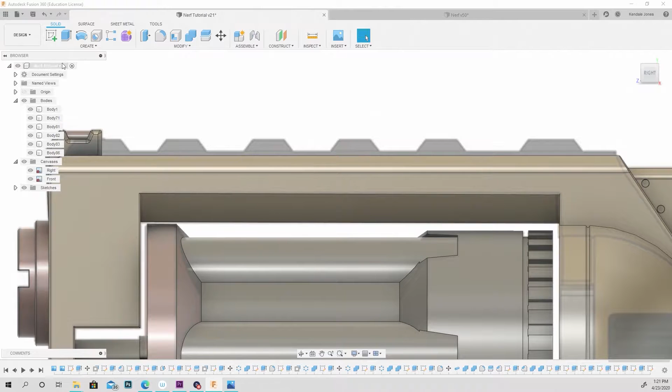Now from the right view, let's just create a sketch on the 2D background. Let's use the 2-point rectangle, and we're going to start with the base. So from the top left corner, about here, and we're going to end around in the back at the bottom right to get that rectangular shape.

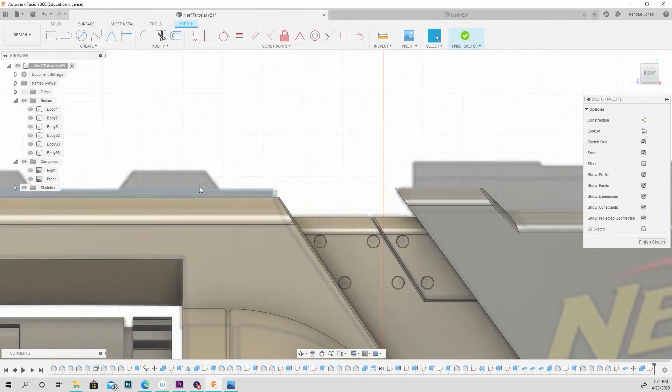Now let's press pull this profile, and let's go to the front view so we can better reference it. I'm going to press pull this to about somewhere around here, and let's set the operation to new body, and change the direction from one side to symmetric, and hit OK.

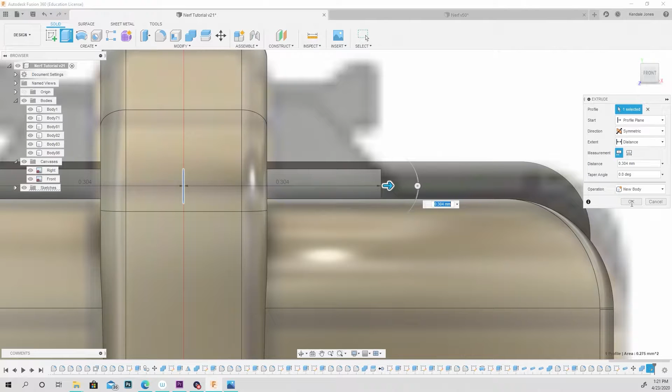Now back in the right view, let's just click the side of the rectangle and create a sketch. Now let's use the line tool to mimic this reference here.

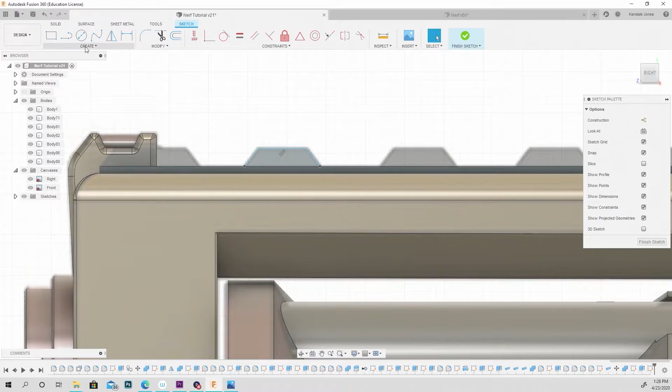Now what we can do is go to the create dropdown and select rectangular pattern, and we're going to pattern this along this surface. So double click to select the entire sketch. Now set the quantity to 4, and we're just going to drag this to about here.

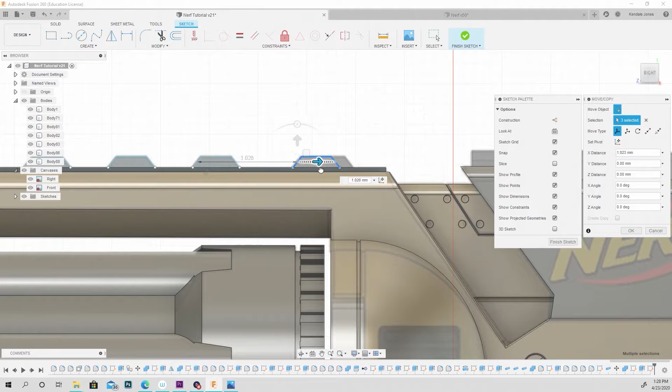Let's hit OK, and let's double click this so we can copy paste, and we're going to drag this along somewhere around here. Hit OK, and let's drag this back end to about here.

And we're going to double click this to select it. Now we're going to copy paste and slide this one to match the reference. And also I want to adjust some of these lines.

So let's just drag this back end line, and we're going to select the top line as well. And we're just going to slide it down so it doesn't intersect with that front side post.

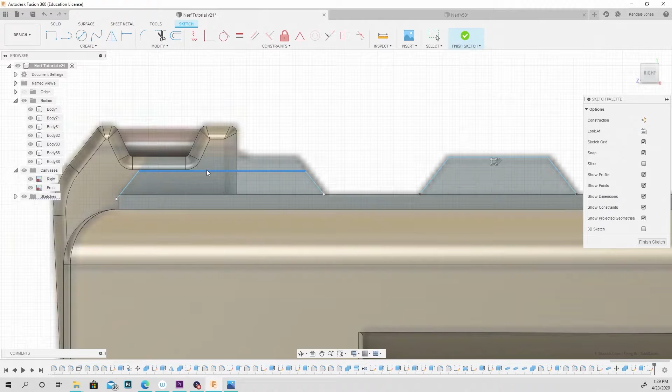Now we can press pull these profiles at the same time by shift selecting them. Let's go back to the front view, and let's just drag these to about the center line. And let's extend past the center line actually, and let's set this to new body.

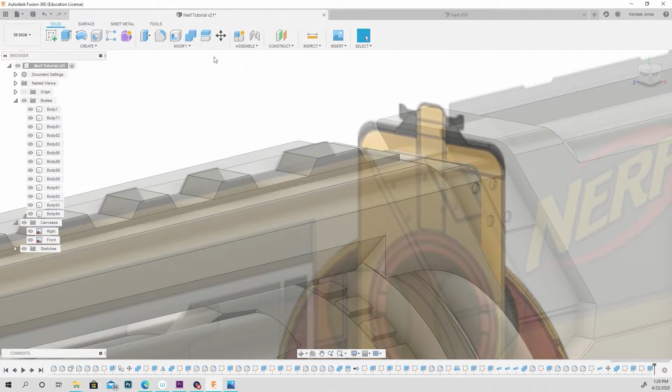Now what I want to do is go to modify, chamfer. I'm going to chamfer these right edges, using the front view to reference. Once satisfied, I'm going to hit OK. I'm going to do the same for this front rectangle as well.

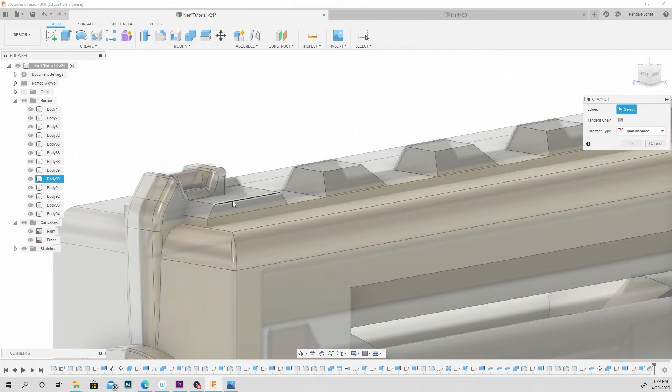Let's just drag this inwards a bit. Let's hit OK.

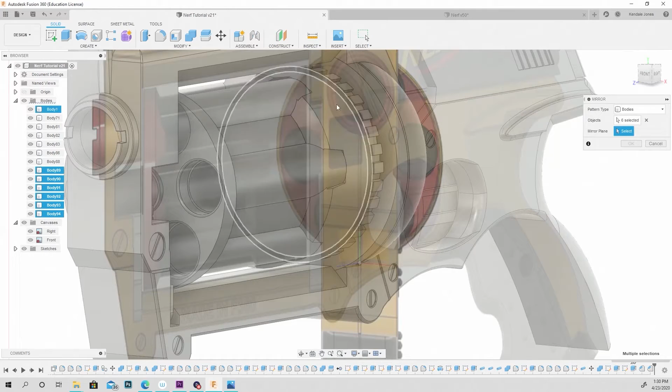Now what I'm going to do is go to create, mirror, and I'm going to mirror all of these rectangular pieces. Then I'm going to select the mirror plane, hold the left mouse button and select YZ, which is that plane, and hit OK.

Now let's combine all of these pieces together. So the bottom base with the rest of these rectangle bodies, and set it to join.

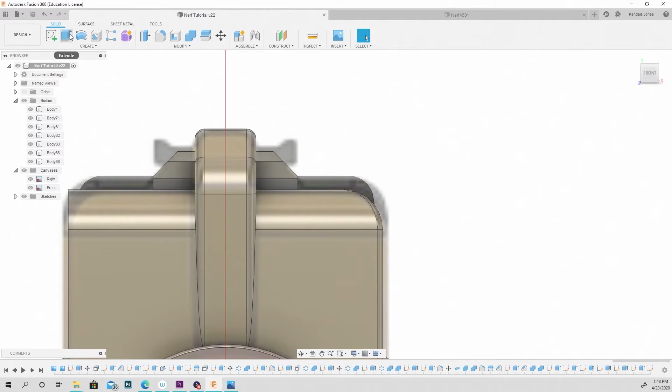Alright guys, so we can go back to the front view, and let's go to create sketch, and select the 2D background.

Now I'm going to show you guys how to mirror a sketch. So to begin, let's start using the line tool, and let's start from the center line, and reference this sketch. So just follow it along.

We'll bring it to about here, and let's go straight down to about here. Now let's bring it back to the center, and let's connect these.

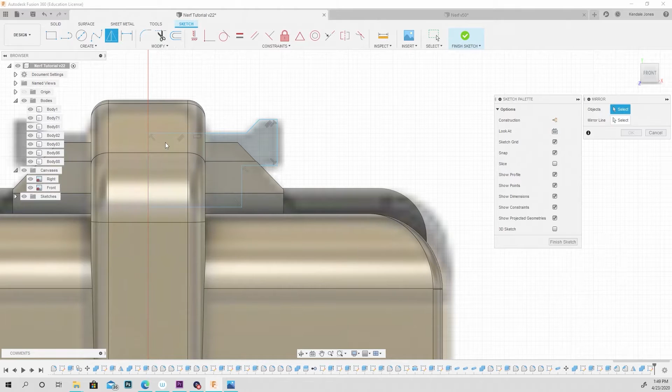Now we can go to the create dropdown and select mirror. Let's select all the lines except for the center line to be the objects, and for the mirror line, let's select the center line, and that just duplicated on the opposite end.

Now whatever you do to one side, notice I drag this line, it copies it on the other end.

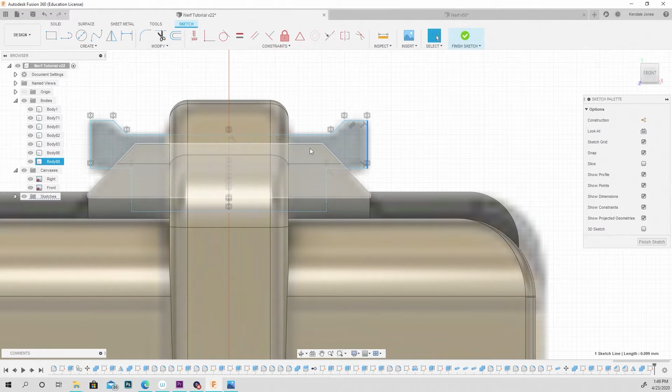Now we can just press pull these profiles. So let's go back to the right view, and let's see where this body ends. Let's just drag it, we'll bring it to about here. Let's change the operation to new body and hit OK.

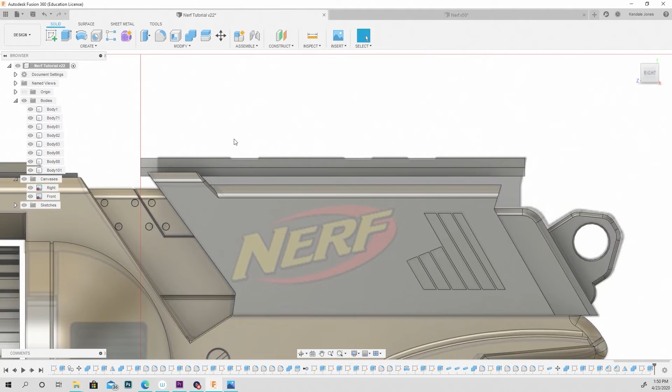Now let's select the front face of this body, and let's press pull this to match the reference. This looks good right here.

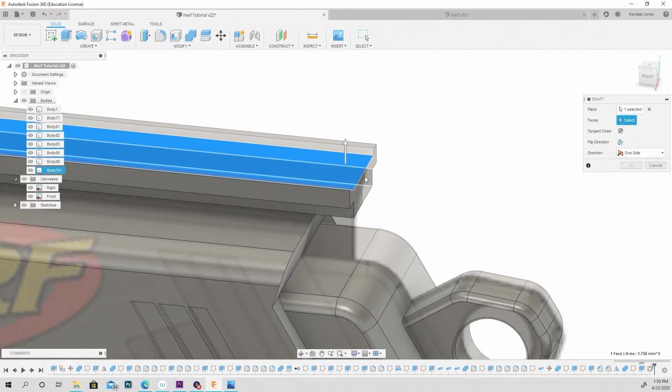Let's hit OK. Now I want to create a draft on the back end. So let's go to modify, draft, and let's select this top face, now the side face, and let's go back to the right view, and we can hit this slider to angle this. Once satisfied, hit OK.

Now we're going to go to the bottom face and create a sketch. Then select Finish Sketch to create that profile that we can just press pull.

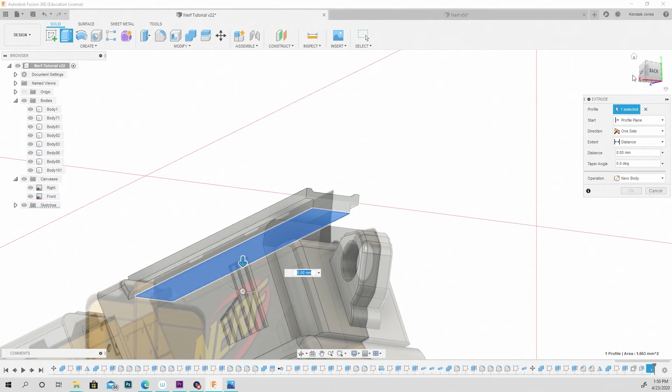And let's follow this reference, and let's just drag it down a bit so that it intersects with this body. Let's change this to new body, hit OK. Let's combine those two pieces together.

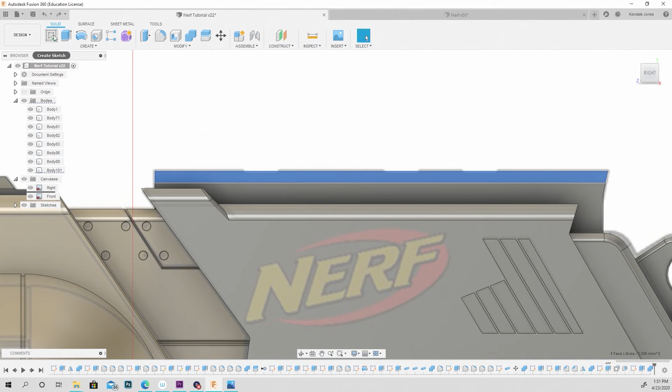Now let's select this face and create a sketch. Now we can use our line tool to mimic this cutout shape.

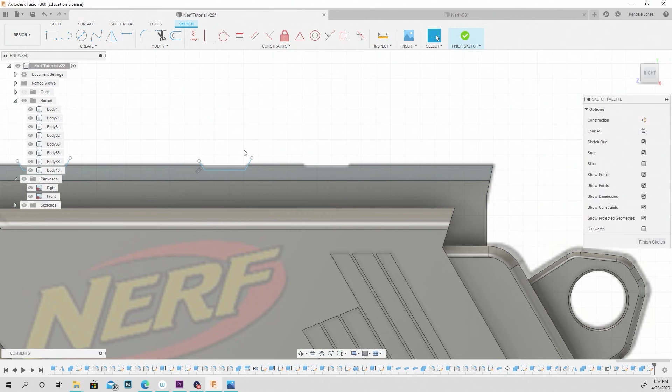Now let's double tap this line to select the entire sketch, and let's Control-C, Control-V to duplicate it along this reference. Now let's Control-V once more so we can create another duplicate and match this last cutout area.

Now we can select these profiles and we can just press-pull them to do a cut, which is a Boolean operation, through both ends. Let's hit OK. Alright guys, and this is a good place to end this video.